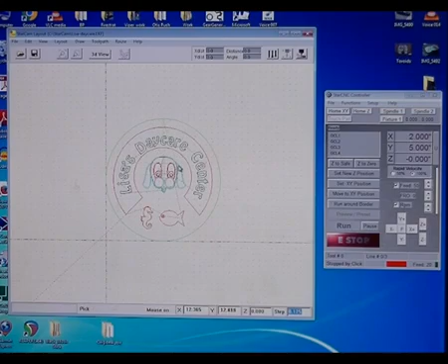So we're going to bring in open job. Now a job file is a StarCam saved file. So I'm going to go down to the StarCam, and typically there's a demo file here. I can scroll my mouse to zoom in and out, drag the right mouse button to drag and zoom, or just to drag there.

Now one of the nice features of StarCam is this layer system. You can have all different, up to 50 different layers, and on each layer you can have the cut depth, and you can have the tool number, whether it wants to tell you to change the tool, or if the machine was a multi-head machine it will automatically change the tool.

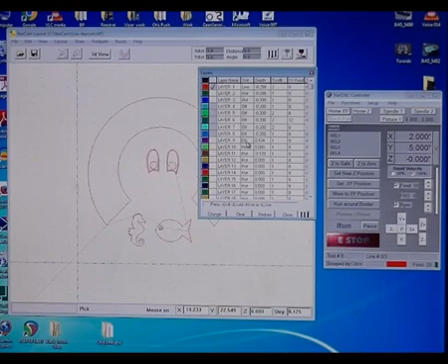But you can turn the layers off. You can just turn one layer on. Let's say we just turn this layer here on, or you can just turn them all on.

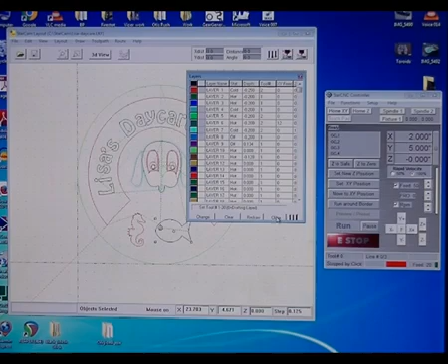Now let's say you want to cut this object here, this fish. The fish is on a red layer. I guess it's going to cut it a quarter of an inch deep, and I'm going to set the tool number to tool 1 on that. Okay, let's close the layer. So we're going to cut the fish.

Now, if we jog the machine to a position and set the XY, we set the machine to cut at a certain position. Let's say set XY, so that'll be the new 0,0. So we can just select the fish.

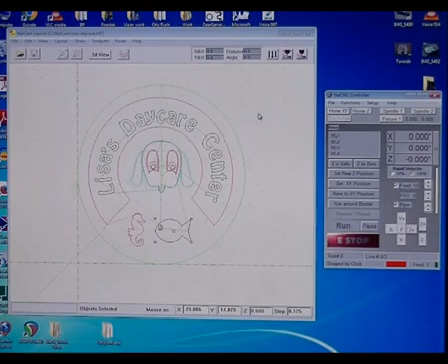I'm going to go to Output, Output, Done, and then you open the spooler file. You just open spooler file, and that should have picked up. Let me check environment setup. Oh, I hit browse, but I didn't double click on C. Double click, OK, save, OK.

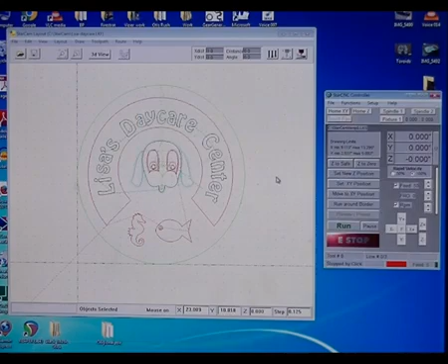Now we do pick up open spooler file. There it is, temp0.lks, Larken spooler file. Now you can just run that.

The machine uses a buffer in the memory of the controller board. The controller board has memory, so it's not running directly from the PC. It's sending the data to the controller in blocks, storing them and running them. So it's a buffered system.

Even if you unplug your USB cable, the machine will keep cutting until the end of the file or the end of the buffer, or you can just hit E-stop. So let's say we hit E-stop here in the middle of the file.

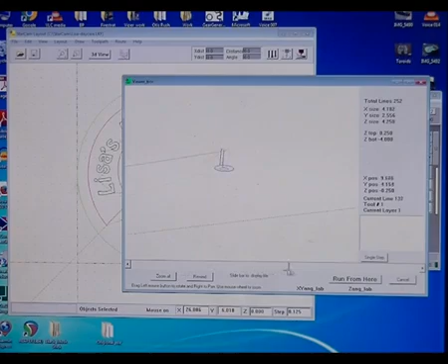Now this button is preview, a preview to preset button. If we pick this up, we can... I'm just going to drag this down, and this allows you to start anywhere in the file. So let's say you broke your cutter and you want to start at a different position.

You can fast forward through the file here with the scroller down below. It just did the eyes first, now it's coming around the fish. So let's say right here we want to continue cutting. You can go run from here, and here is the lines. There's the fish. You can just scroll back and forward.

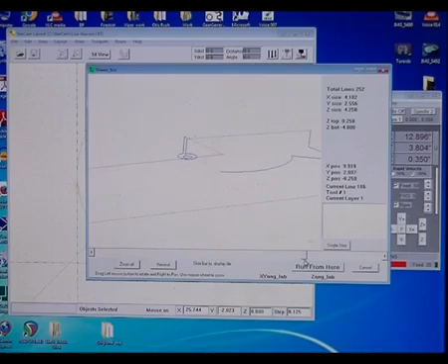It's redrawing as it's doing, so don't move the scroller too fast on large files. Okay, so we want to cut, you just have to go run from here. Click, okay, and it's going to say continue cutting from here. Turn the start to spindle, move to the coordinates, and it'll automatically do it. So now when you do run, the machine will move to that new spot on the fish, drop the cutter, and continue cutting.

Alright, so it's doing its cutting. It's coming around, and this is running line 77 of 84, vectors in the memory of the StarCam board, USB board that's in the control box.

Okay, so if you're doing simple 2D and 2.5D, StarCam is a good companion for the StarCNC. But if you're using MasterCam or a CAM program and you want to bypass this program, you can also just bring your G-code file

directly into. You can go G-code mode, just click on there, and then you go open G-code file. And then you can just directly run a G-code file, and you can do the same thing. You can preview it or preset the new cutting position. So it works either in G-code or StarCam mode.

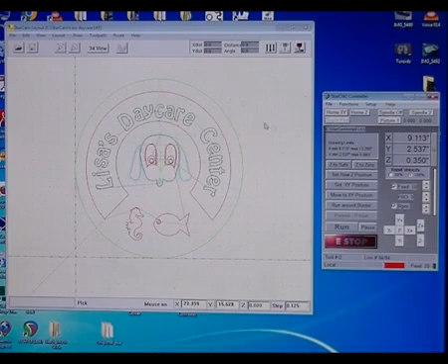Now, if you're cutting from CorelDRAW and you want to cut flat, this program has multiple options. You can define all your tools. You can set the maximum cut per pass, and it'll do multi-pass cutting on flat 2D objects. StarCam can also import G-code.

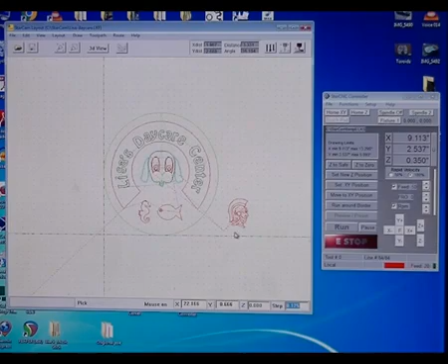Now if we go here, I'm going to go C drive, and we're going to go down to StarCam. Oh, that's it. Now this is a 3D, actually that's actually a 3D object from VCarve Pro. So you got 3D, view 3D. You can actually see, and I'm zooming in the view 3D menu. This is a 3D object.

So within layout, I'm going to do file new. I'm going to new, get rid of it, and I'm going to go open G-code, and I'm going to try to look for a different one. Oh, okay, it's actually, it was a G-code, but it's a 3D now.

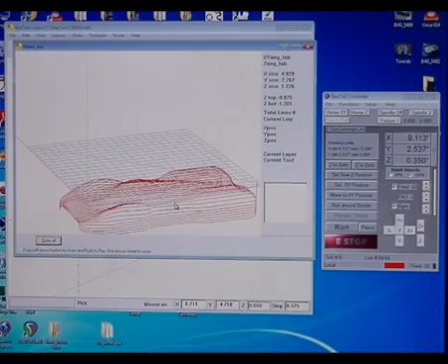I converted it. Okay, so this is, that's a fully 3D car. I could go view 3D. So view 3D, okay, zoom all. There it is, alright. So there it is. Now I can change the view here by dragging the left mouse button, or I can zoom in and out with the right mouse button.

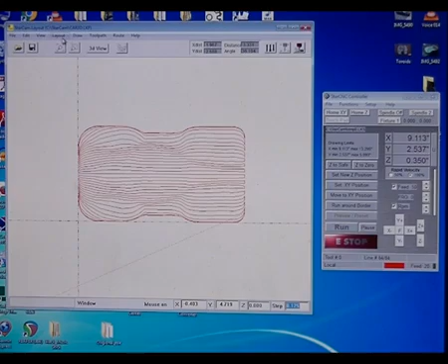Okay, so there is on a layer. Now let's say that is on layer 1, okay, let's say on layer 5, I selected the blue layer, and I'm going to just draw a box around it. Draw box. And now let's say I wanted to cut out that 3D car, I could use this box. And so that's a 2D line mixed with a 3D object. And then I want to set a depth of minus 0.5 inches, let's say.

Close. Now, if I do a zoom 3D, you see the box there, the blue box around the 3D car. This was designed in VCarve Pro, and this was just drawn in StarCam. So you can mix the two. You can mix as many as you want, all on layers, 2D and 3D.

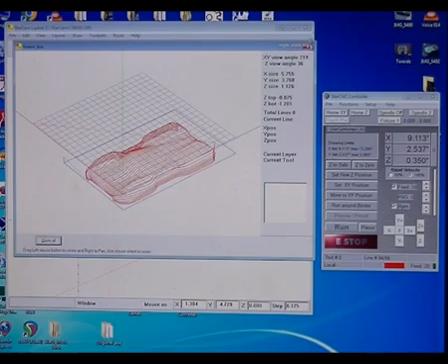So the cutter goes over to here, it drops, goes around, and if you want to cut this whole thing to the machine, you just go select it, output, done, and run. I'll go back to StarCam mode. File, open, Star Explorer, temp 0, run. And that's how fast it is, easy as to run from StarCam.

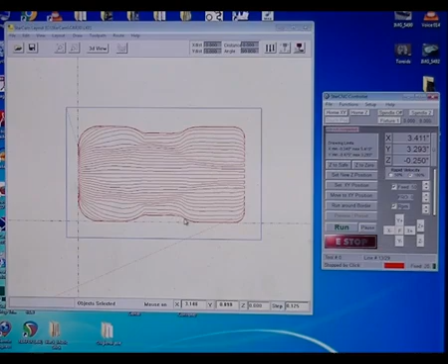Well, let's say we just want to stop, and we just want to cut the outline. You could just select the outline, and you can just cut. And it's just going to cut the outline. And nothing loses position because the machine has, you've told the machine where you want your part cut by these buttons previously, and this always cuts exactly where it is in the drawing.

That's the origin, X0 Y0. Now you could move the whole thing. We could select it all, and we could do, in the edit menu, you've got move, you've got scale, you've got rotate, or we could just grab it here and just move it like that. Okay, or you can select it all and we just go layout, auto position, and you can do centered on origin or a bunch of others.

Alright, there's going to be another tutorial on how to use StarCam, so that's just a preliminary. But if you wanted to run something directly from NC, a G-code, you could just go File, G-code mode, File, Open G-code, and then we could just go down to, there's a G-code file here, StarCam, there's Centurion.nc, open,

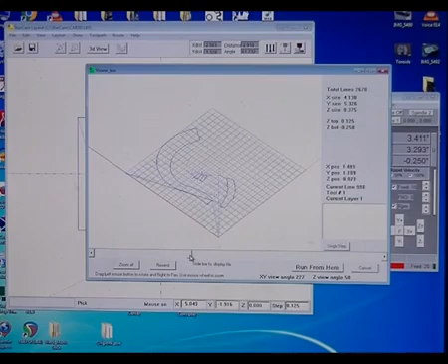and you could also do Preview, and there it is there, and you could pick anywhere you want to start, or start from, just hit rewind. Okay. And so you can run from G-code too. Cancel. Alright, and you just hit run and it would start cutting that 3D G-code object. And that's the end of this presentation.